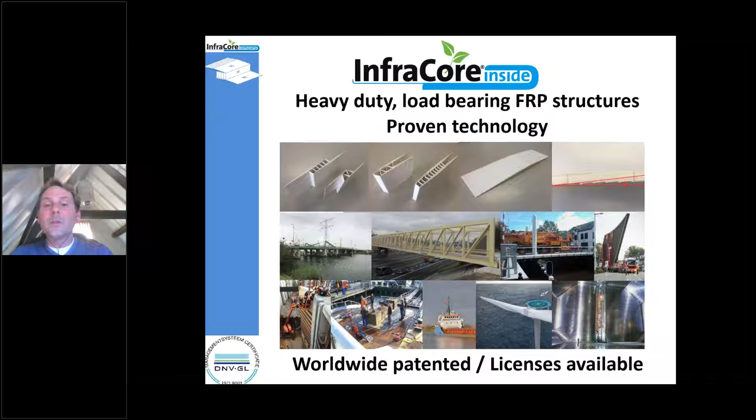As Ruben indicated, we are in heavy-duty load-bearing composite structures. What you see here are a number of bridges. On the lower left, you see the world's largest composite lock gates, which I will show later on as well. And bottom right, the second picture from the left, that's a helideck that we did for the bigger yacht of Steven Spielberg. So we have already a number of applications on board of real ships.

As stated, I will start with FiberCore Europe. What is FiberCore Europe? Focusing on bridges and lock gates, they have their own production facility in Rotterdam, and they are really pioneers in the composite bridge world. They have been doing that since 1996.

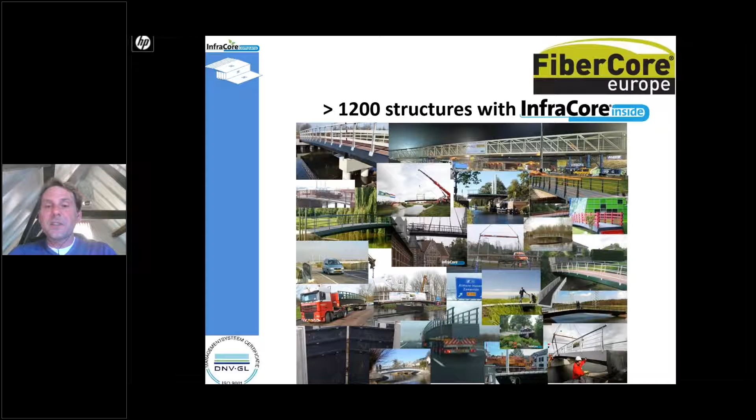So how many bridges? They have delivered more than 1,200 bridges already in the last couple of years. These bridges go from the lighter class, the pedestrian bridges, all the way up to the heaviest load class, the 60-ton class bridges for heavy traffic.

InfraCore IP is another company within the InfraCore holding. That's where all the patents are stored. We have patents on the way fabrics are placed in the products, patents on the way of infusing those fabrics, so how the resin is introduced into the end product, and we also have patents on the mold system, because it's interesting to mention that these 1,200 bridges have been built on the same mold, so the mold costs are in most cases out of the commercial equation, which brings me to the first bold statement of tonight.

It's a fact that composite materials are more expensive than conventional maritime products such as steel, but FiberCore Europe is cost competitive purchasing-wise with their composite bridges as compared to wood, concrete or steel. One reason is that the mold system is out of the commercial equation, and there are other reasons which I will elaborate on during this presentation.

What you see here is the basic technology, how the fabrics are placed. And we have solved one of the biggest challenges of the composite world, namely delamination, which means a crack can propagate between layers, which can also happen with us. But we have made delamination inconsequential because it cannot grow further than a certain extent, and I will explain that in a few slides.

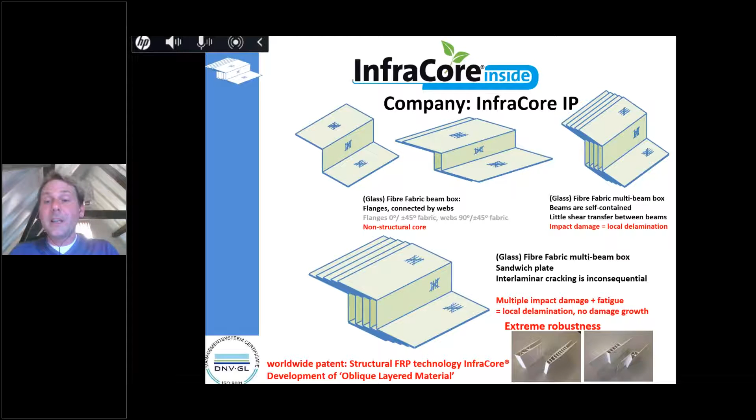We already have a number of licensing agreements with partners everywhere in the world, so that could also be the case for you. The technology is available under license to whomever is interested in it.

So I stated that fatigue after impact will lead to local delamination, but it cannot propagate. That's not only a theoretical statement, it has been proven and validated, and it has been witnessed by DNV. What you see here is a 60-ton traffic bridge, which has been seriously impact damaged and has been put into a fatigue cycle of 120 years, so 30 million cycles.

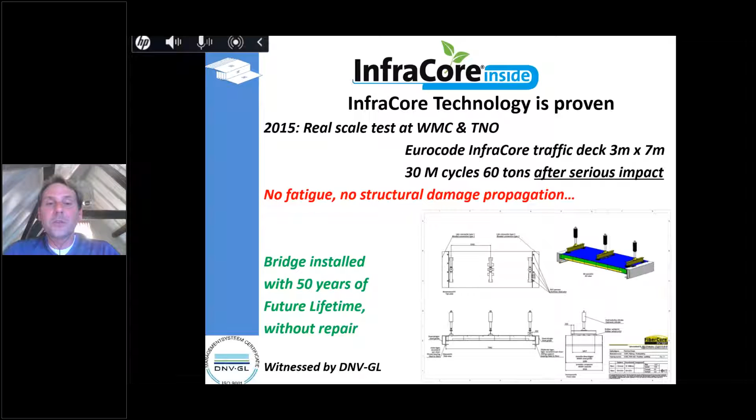We have proven that the delamination from these local impacts has not propagated, has not grown, which has led classification societies to state that this bridge could be installed without repair for a remaining lifetime of 50 years. I'm super proud of being capable of saying that a bridge can be seriously damaged, put into a fatigue cycle for 120 years, and can be installed without repair with a remaining lifetime of 50 years.

So these are the typical pictures that most people have when they think of composites. It's an amazing material, but once it fails, it fails rapidly. Think of wind turbine blades that collapse globally because of fatigue, or ships subjected to slamming loads that just delaminate completely. That cannot happen to this extent with our technology.

Our technology has a serious track record. More than 1,200 heavy-duty structures have been realized. We are very cost effective. We are damage tolerant with extreme robustness. Last but not least, one of the weaknesses of composites is that they fail fast under fire. We have excellent structural load capacity under fire, which I will also demonstrate later on. And we are lighter and cheaper than conventional sandwich composite structures, which I will also explain during this presentation.

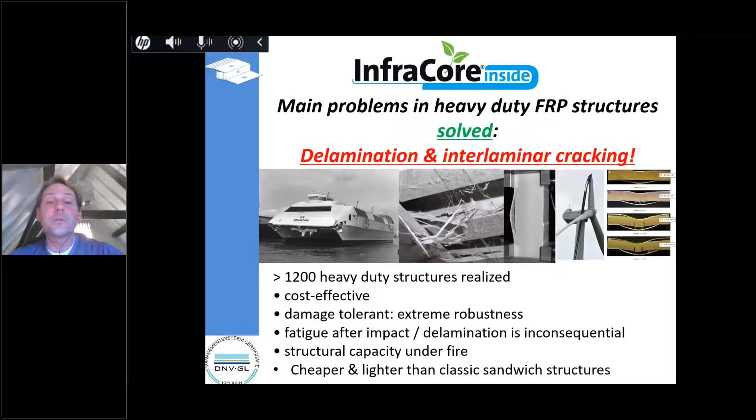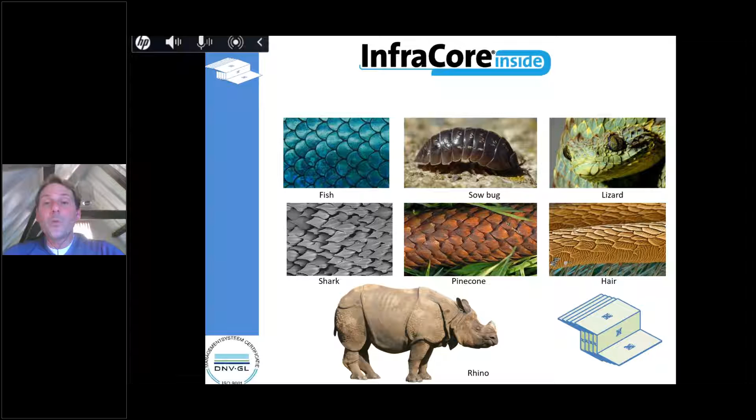Did we invent something? Definitely. Was it inspired by nature? Certainly. What you see here is actually an oblique layered structure, which you can see in fishes, sharks, bugs, rhinoceroses, even in our hair structure. We have actually the same basic principle in our composite technology.

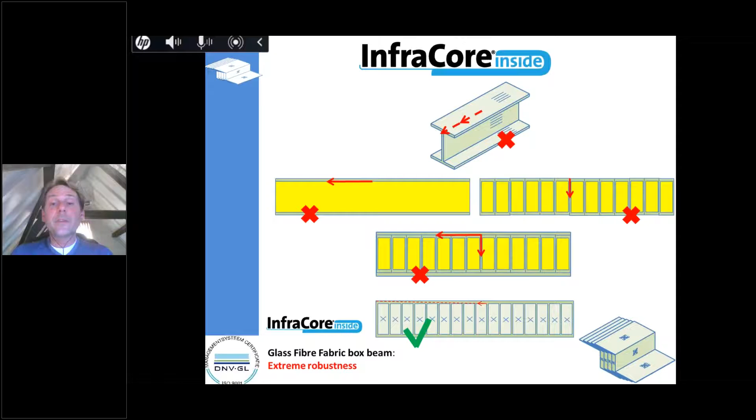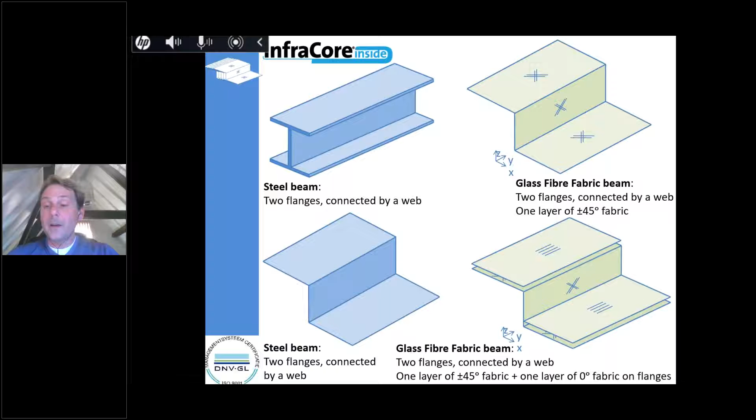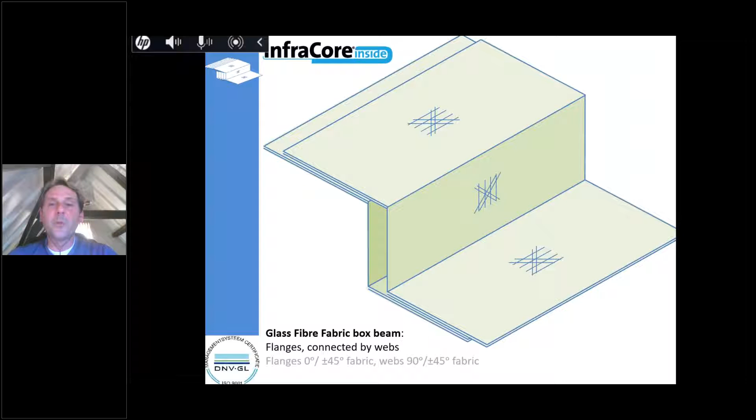So we start with this basic Z layer. We add additional material where deemed necessary, and we just continue stacking those fabric beams. It's very important that you understand these fabric beams in this phase are not consolidated. These are dry fabrics placed into a mold in a very fast and efficient way before being frozen in their end geometry by injecting resin.

In order to stack these preforms, between these perpendicular webs you have non-structural foam. So in the first step of our production phase, we take a foam preform, wrap it, surround it with dry fabrics, then go to the mold and stack these preforms next to each other.

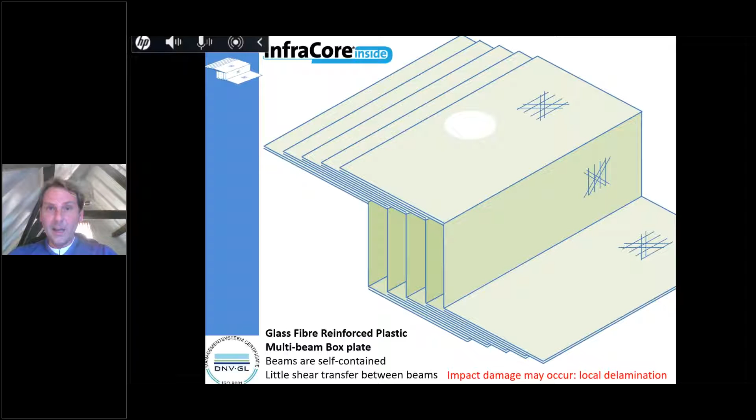And once the product is consolidated, injected with resin, you would impact it as I just did, and then fatigue it. This is just showing how a fatigue cycle would look by driving over it with a wheel, but it could be hogging and sagging because of a ship.

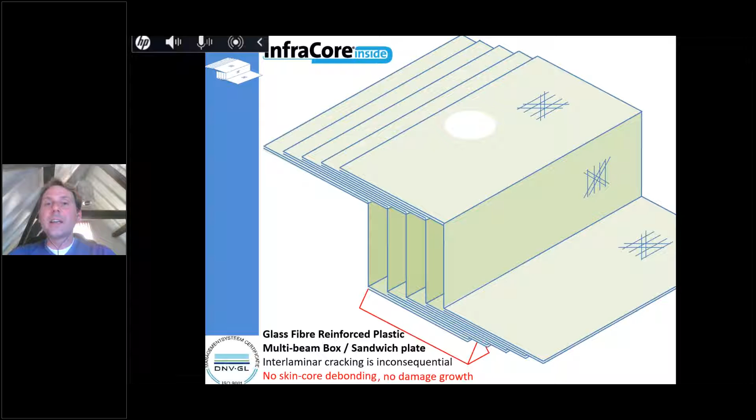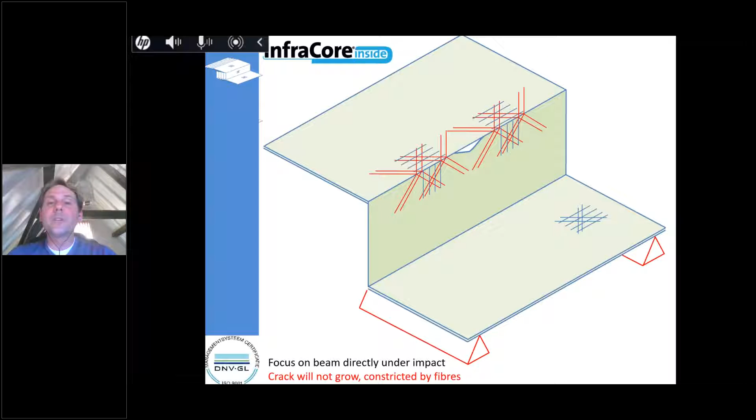This local damage cannot grow any further than the overlap you see in each preform. So again, you see this local impact attacking this vertical web, but there's plenty of remaining material around it, surrounding it, to transfer the loads.

And you could think, okay, this is a nice way of doing that. So you have these inner stiffeners in a certain direction. But what if you need shear stiffeners in the other direction?

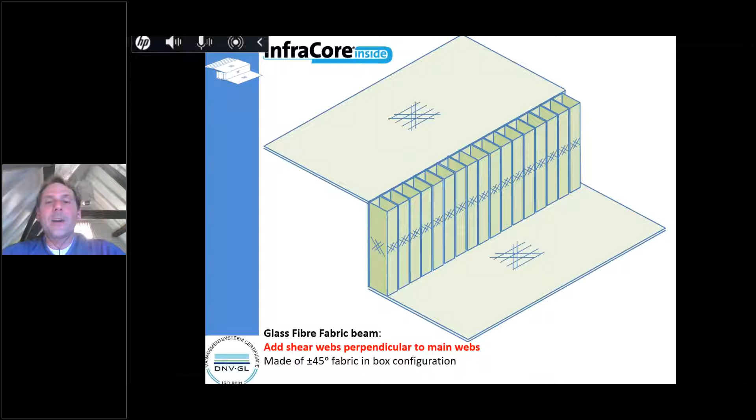Then instead of working with a standard non-structural foam block as core material, you would work with these little blocks which have been surrounded by fabric in order to have webs in the other direction. So we can definitely work with webs in perpendicular direction to the main webs.

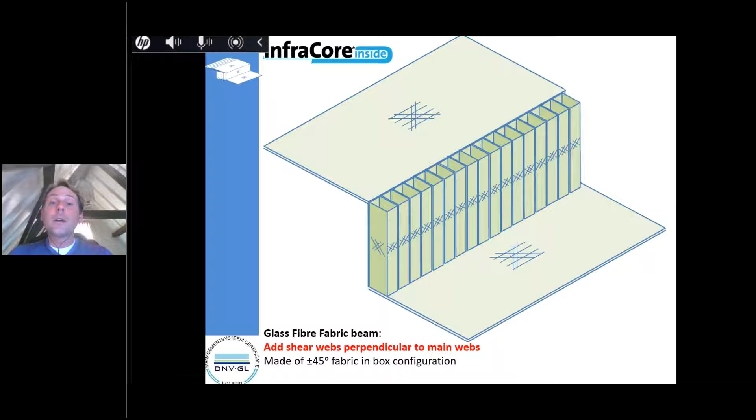And if you need even more strength, instead of using a non-structural foam block, you could work with a full composite monolithic block, which enables us to transfer massive forces in the out-of-plane direction, and also helps us drill holes wherever deemed necessary. So you could attach an engine foundation, for instance, just by drilling holes in these monolithic blocks.

So what I'm trying to say is we can place webs in each direction as we want. If deemed necessary locally, we go for a full reinforcement, which enables us a lot of flexibility in the design, in the production, and in the outfitting eventually.

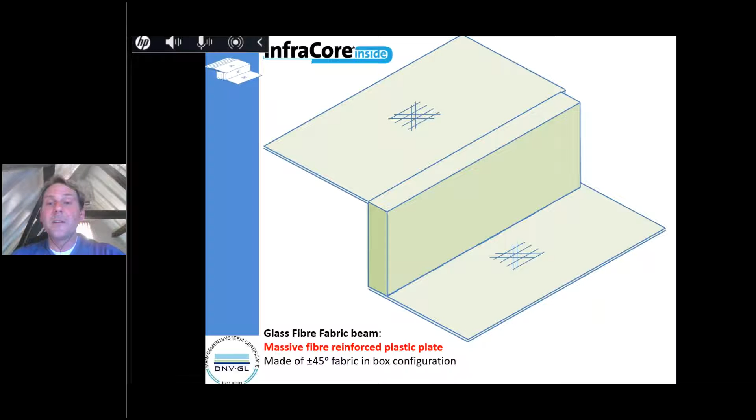So this is, I think, the best illustration of our technology, where you have these overlapping layers, which enables us to avoid this global crack growth propagation, which would lead to delamination.

We can add webs in every direction as deemed necessary, and we can make structures going from a height of 4 centimeters all the way up to what we already did. We could go further, but we already went to structures with a height of 3 meters. So we can make very slender products, but also very high products.

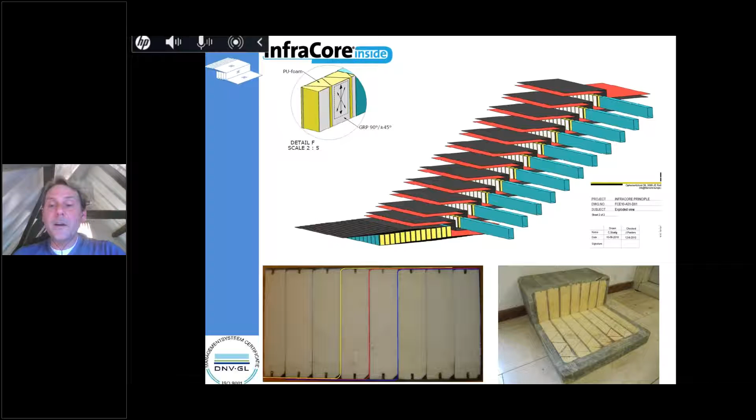And the suggestion could be that we only make flat products, but later on we will show that we can also make curved structures, and even hydrodynamic profiled structures like rudder flaps.

So that was about the fabric technology. Then I would like to focus on the sheer size of the products, because another aspect of our patented technology is the resin infusion.

So the way we inject our products, that's a modular technology. For us, it's kind of irrelevant how large the product is, because the resin infusion strategy is modular. Whether it's 1 square meter or 1 square kilometer, for us it's the same building block approach, just a matter of scaling it up. What you see here is a 60-ton traffic bridge.

What you see here is a 142-meter bridge, which is a hybrid bridge. So the vertical steel trusses are there, and the road you drive on, that's our InfraCore bridge. So we also make hybrid applications, how to assemble composite to composite or composite to steel. We have that knowledge in-house.

A nice anecdote is the composite and the steel of this bridge was assembled on site next to the highway in the middle of winter. It was freezing cold, and the bridge was placed in its final position in 2 times 4 hours.

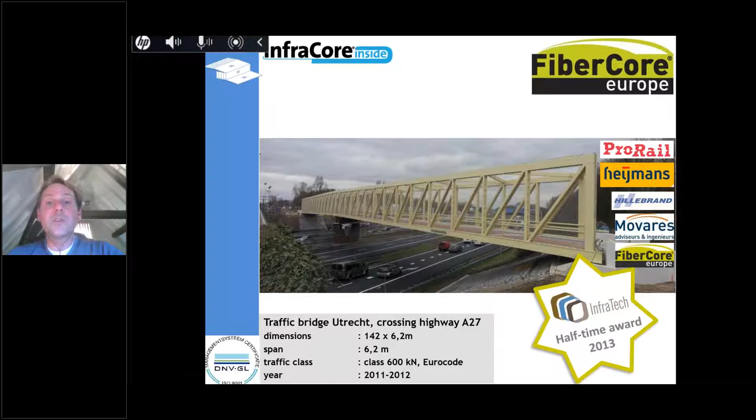The composite technology definitely has advantages in terms of robustness, but it's also lightweight, and it facilitates benefits in mounting and transporting, and I will come back to that later on.

This is a nice example of the size of our product, but also relatively lightweight, so you can still transport this massive plate on a truck in this position. And these bridges are so lightweight that they are buoyant.

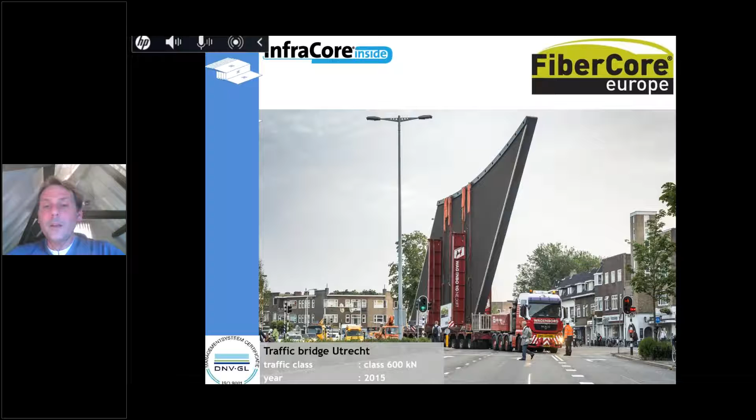So there are places where it was difficult to get to with a truck, but there was water in the vicinity. So you just attach them behind the tugboat, because they are buoyant, and you just tow them to their final position. The world's largest lock gates are placed in the Wilhelmina Canal in the Netherlands.

They stop a water column of, out of my head, 9 meters, and if these lock gates would fail, Rotterdam would be flooded. As our foreign friends probably know, most of the Netherlands is below sea level. So this lock gate is critical, absolutely critical.

If these would fail, Rotterdam again would be flooded. So we had to demonstrate to various players, for example ministries, that this application is safe. We had to demonstrate that these composite lock gates could survive an impact of an inland vessel, and we take pride in ensuring that our applications are the last in line to fail.

So concrete would fail first, then the steel pins connecting the lock gates to the outside world would fail, and only then are we allowed to fail. So these products are extremely safe.

Why is that? One of the reasons is composites are more flexible than steel. So most of our applications are designed on stiffness, on deflection, and strength is a result of that. So the strength and safety reserve factors you get are huge.

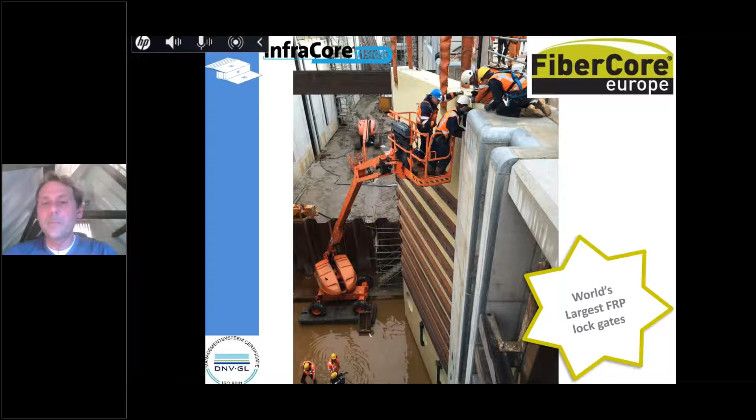Also a nice anecdote: these lock gates were also buoyant, so we had to add weight in the bottom to make sure they would not float. And because of using these monolithic heavy blocks in the bottom, it enabled us to drill these water flow channels that you see in the bottom - just a matter of drilling big holes through these massive blocks.

Then we zoom in on InfraCore Company. What is InfraCore Company all about? We use the same technology as FiberCore Europe, but we do not use it in bridges and lock gates - that's their business. We take care of all product market combinations in other sectors.

And we do that together with key strategic partners, based on the proven track record of FiberCore Europe and on the patented InfraCore technology. Our basic philosophy is we do what we are best at, that's composites, and we cooperate with partners that have additional strengths and knowledge. Again, our technology is available in licensing forms or partnerships.

So I come from the maritime world. I'm an aerospace engineer, I also have some degrees in naval architecture, and I've been active in the maritime world for a couple of years. So InfraCore Company is also heavily involved in the maritime, offshore and inland business.

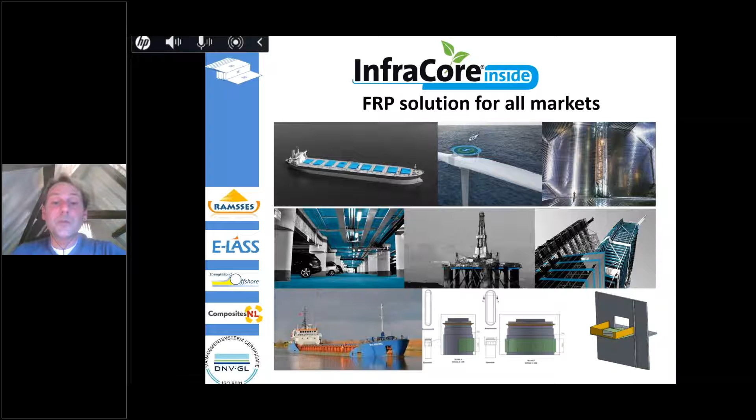What you see here are a number of applications that we're thinking of. Just look at the pictures - hatch covers, offshore access platforms, heli decks, also massive hydrogen tanks, offshore platforms. We could do total ships, ship elements, balconies, fenders.

What you see here is a non-protected, really basic InfraCore composite structure, which has been subjected to 2 hours of fire testing under structural load, because we had to prove that the structural load capacity of our technology is good in order to install this heli deck on the mega yacht of Steven Spielberg. This fire test was stopped after 2 hours, not because there was a reason to, it's just nothing was happening, so the Fire Testing Institute said there's no reason to continue.

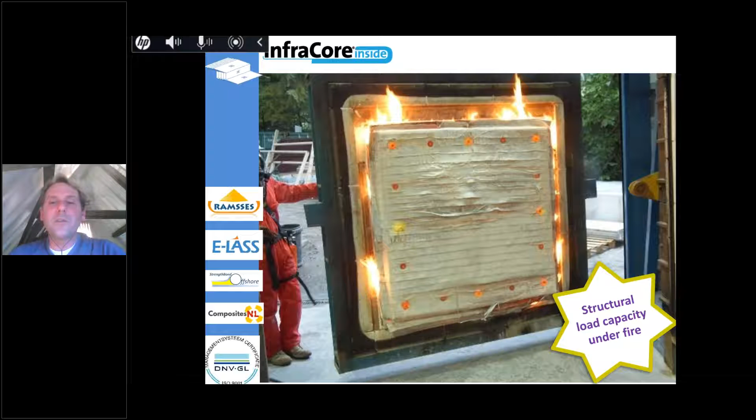This could survive the fire for hours and hours, which helped me, together with my colleagues, convince Meyer Werft, a huge cruise ship builder, to start a project with them. We developed for them inner and outer composite walls which should replace the steel bulkheads, but also have in the concept the fire insulation, the noise insulation, and the aesthetical finish. So instead of having steel plus fire insulation, noise insulation, and an aesthetic wall, we developed one fit-all solution. Everything is in our bare composite structure.

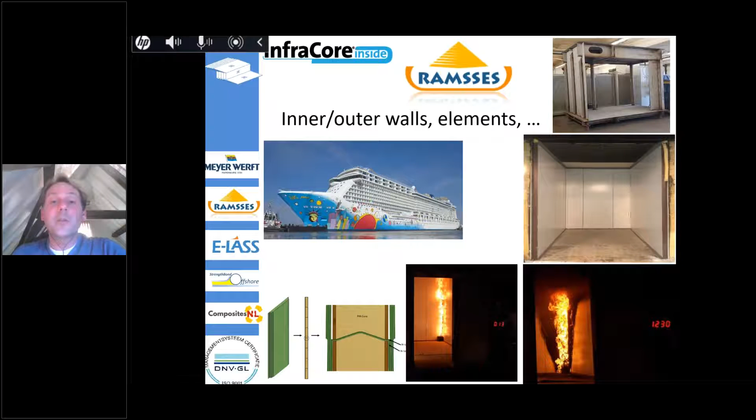We developed a solution which is really impressive in terms of fire protection, which enabled us to reach an FRD 60 certificate. What is FRD 60 for our steel friends? That's the composite equivalent of A60. So it's a structurally loaded structure which can withstand 60 minutes of fire under loading, without a temperature rise that exceeds a certain threshold on the backside, and with a maximum allowable deflection. Again, without added passive fire insulation, it's just the bare composite structure which has reached this FRD 60 certificate.

Another project I want to briefly highlight, because I could talk for days about this one too, is called patch repair of FPSOs. FPSOs are huge ship structures that are so large they cannot go into dry dock. So the repair and maintenance should happen on site, at sea. And if you want to crop and weld, you need to inert the tanks, which takes weeks and sometimes months, which is very costly. So we were requested by big players like Total, Petrobras, and Naval Group to come up with a composite patch repair enabling cold patch repair.

So we would just laminate, actually resin-infuse fabrics onto the strength deck of FPSOs, so that the strength deck would be nominally performant again, without any disturbance to the operation.

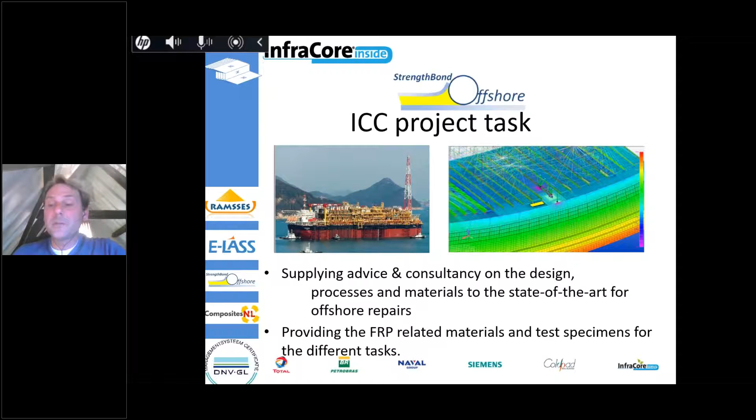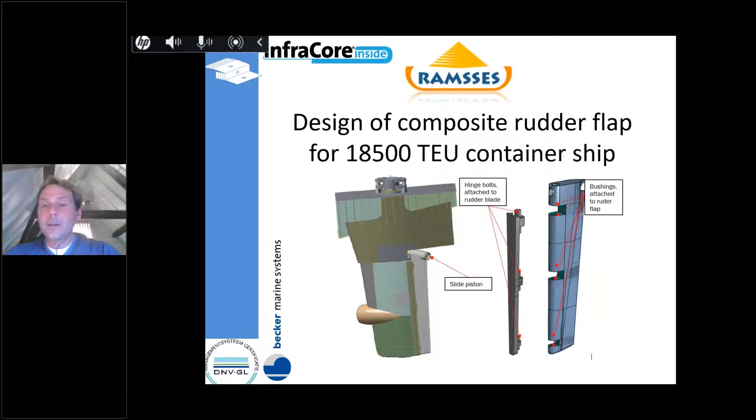Then this project. What I should first state is that our InfraCore composite technology also has a specific patent on NACA profiles, so we can make airplane wings, wind turbine blades, but also rudder flaps. We convinced Becker Marine Systems to trust us in developing for them a rudder flap, actually the largest rudder flap they have sold until now, in composites. This is the composite rudder flap for the 18,500 TEU container ship. What you see on this slide is, on the left, the aft ship, the rudder stock, and the rudder flap. And the rudder flap is the baby, a big baby, that we developed.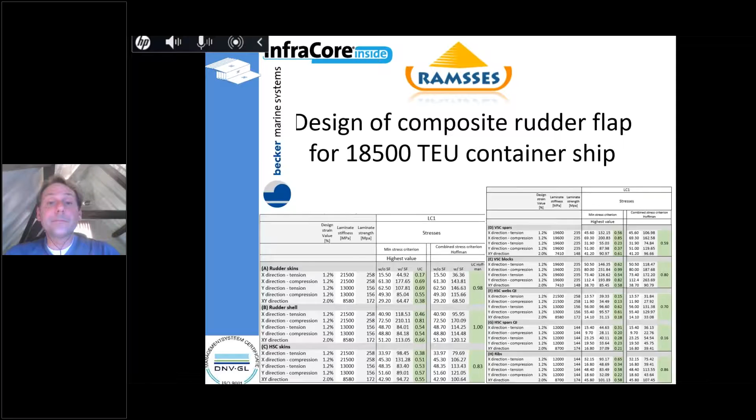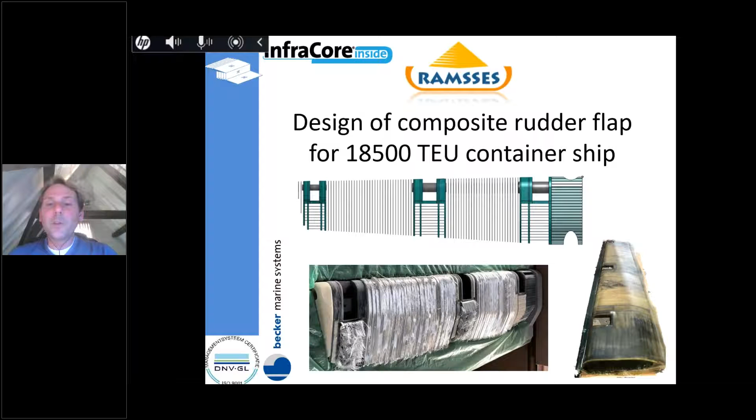Then we produced a scale 1 to 6 rudder flap, because we could well have produced it at scale 1 to 1 — again, size does not matter for us — but you should be capable of testing such a thing. This rudder flap has, just to give you a feeling, 100 tons per square meter loading, so it's a heavily loaded beast. In order to test it in an ultimate way, up to failure, scale 1 to 6 was chosen.

And how did we test it? This was tested in Hamburg by Becker Marine Systems. It was tested in a steel rig, and the deflection was imposed by inflating air cushions, the type of air cushions you could use to lift ships or skyscrapers with — really heavy-duty air cushions. And on the lower right, you see a picture of the rudder flap.

For us, aesthetics is an option. We can also make nice polished and shiny composite structures, as most of us know, on sailing yachts and mega yachts. But for us, aesthetics is an option.

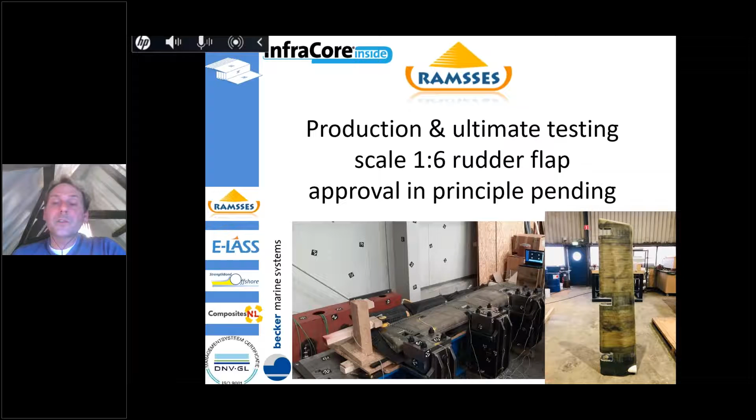Becker Marine Systems agreed with us that this rudder flap should be as light as possible, but as cost effective as possible. So if the steel has an allowable tolerance of plus or minus 5 millimeters, why should the composite be smoother? We agreed with Becker that it should have the same rough finish as the steel one, which enabled us to use a very rudimentary mold system, leading to reduced cost. We could make it polished again, but good enough is good enough, and aesthetics is for us an option.

What you see here are some pictures showing the rudder flap under loading. We reached something like 2.5 times the class load, so plenty of safety factors in this design again. Dry testing was successful, very successful.

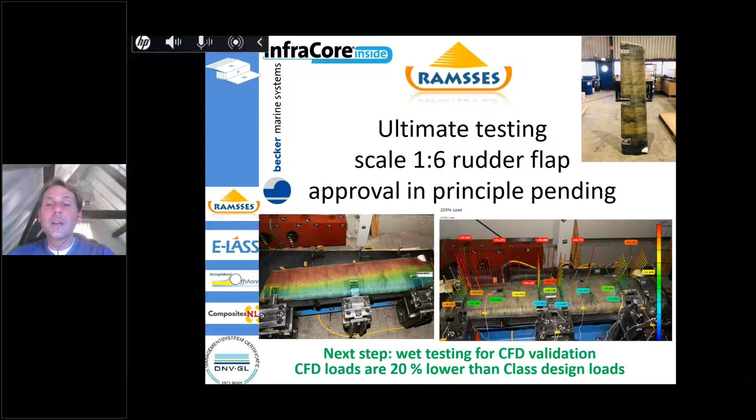Next step, we will produce a second rudder flap which will go into wet testing, so that we can validate the hydrodynamic performance of the rudder flap, and also demonstrate that the actual hydrodynamic loads are 20% lower than the class imposed loads, meaning this rudder flap is more than safe enough.

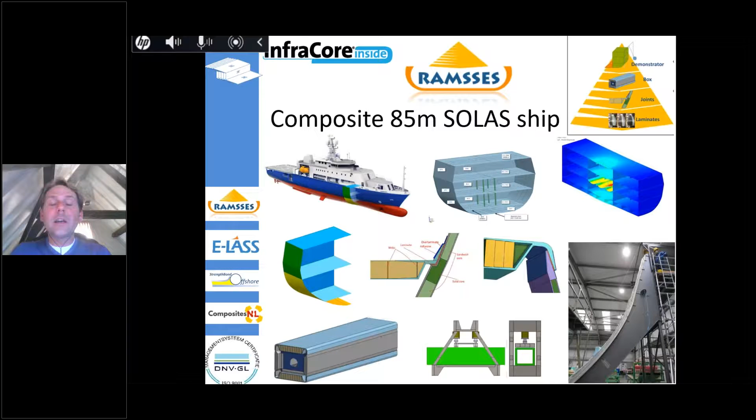This brings me to the next project I want to highlight. This is a project we have worked on together with project partners. Work package leader is Damen Naval and Damen Shipyards, Airborne Composites, Airborne UK, also a composite player. We have Evonik, a huge company active in chemistry, who developed the dedicated resin. We have TNO, who was involved in the testing, which we will show later on. So this was a joint effort.

InfraCore was in the first instance approached because of the heli deck. You can imagine that if you can make a 60-ton traffic bridge, a heli deck for a ship is kind of similar. But during the course of the design work, in good accordance with our project partners, we were allowed to take care of the decks, also the inner decks. So we took care of the strength deck, the heli deck, the inner decks, but also the bulkheads. We also took care of the joint design, the assembly, the overall assembly, and we did the infusion of the hull. Airborne UK did a sandwich hull, and we did an InfraCore hull, which I will show later on.

The result of this design work is that Damen initially did a full sandwich ship design, which was already way lighter than the steel benchmark, something like 40% lighter, I think. And we reduced this weight even further by translating sandwich into InfraCore, so the weight reduction was stretched 15% further. I think we have proven to our partners that our solution is not only lighter, but also more cost effective, and has increased robustness as well.

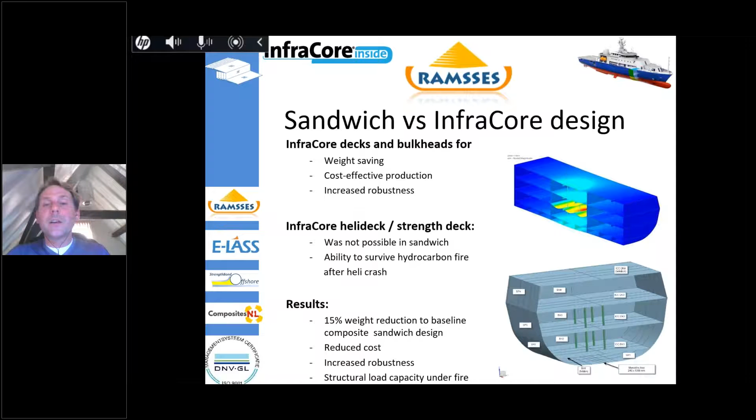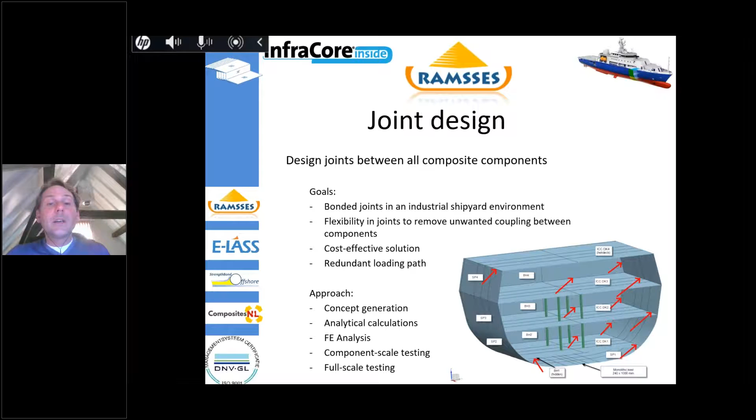As said, we also developed a joint design. For us, it's very important that everything we do, we want to do wherever deemed needed. So whether it's on an FPSO in the middle of the ocean, or we should build a composite ship in a steel shipyard, that's what we want to do. We developed joints which can be created and assembled wherever, and we did that at Damen in the steel shipyard.

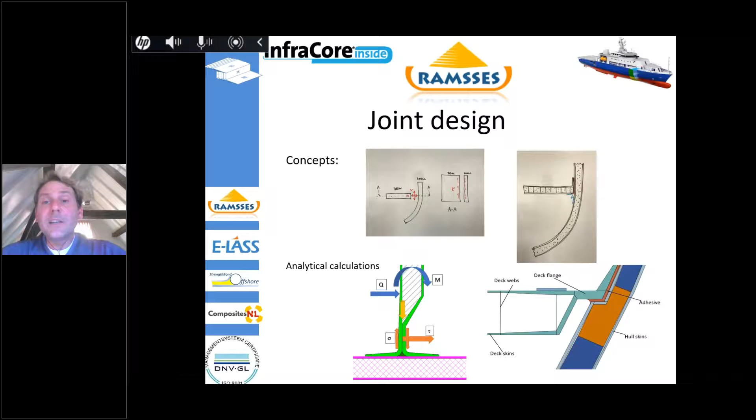We want to have plenty of redundancy. Most of our joint designs are based on 3 basic principles. Here in the ship design, we respected 2 of them. First, we want to have a shape lock, so even if the connection would fail, it cannot move, it cannot go anywhere. That's basic principle number 1, shape lock. And number 2, chemical lock, in this case an adhesive connection.

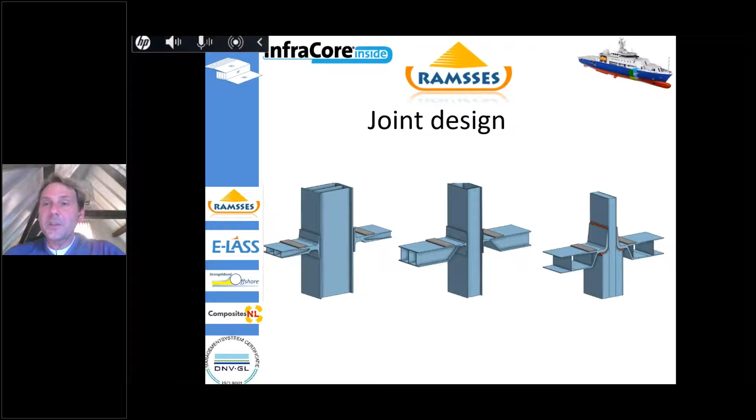These are basic designs of the ship joints that we have developed. So for the ship, or for the hull deck, the deck bulkhead, the hull bulkhead, all possible joints that can be found in a ship have been designed, produced, and tested.

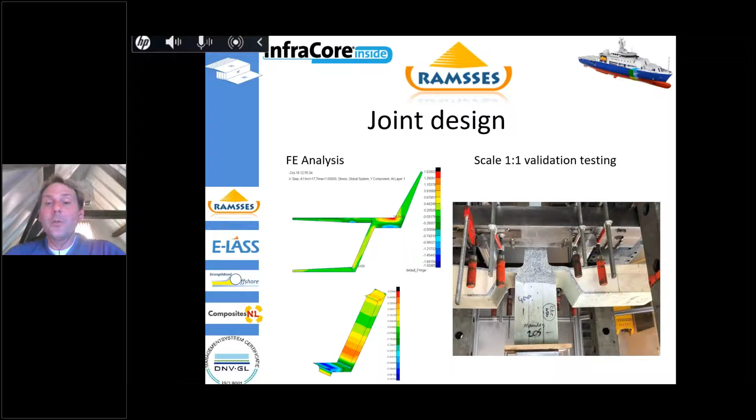On the left you see first the detailed finite element analysis, and then we produced scale 1-1 joints, all types of joints that were then tested by TNO to prove and validate the design work.

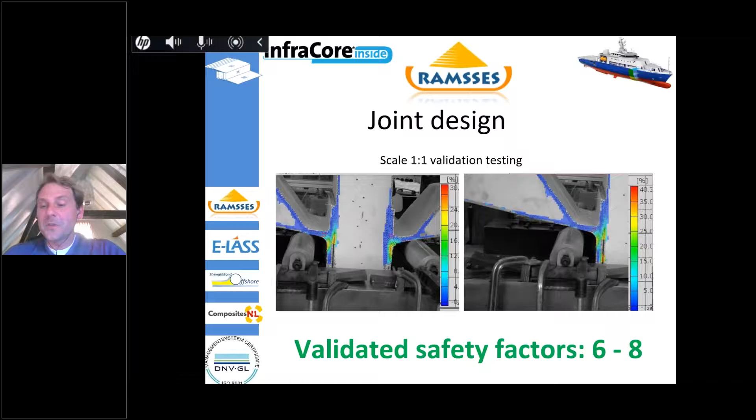All designs, all joints, all joint types have been tested, and all have survived the ultimate test with safety factors minimally 6 all the way up to 8, which was nice because it enabled class Bureau Veritas to say that fatigue assessment was not needed of these joints. If you can demonstrate a minimum amount of safety, additional detailed fatigue assessments are not required. And that was reached.

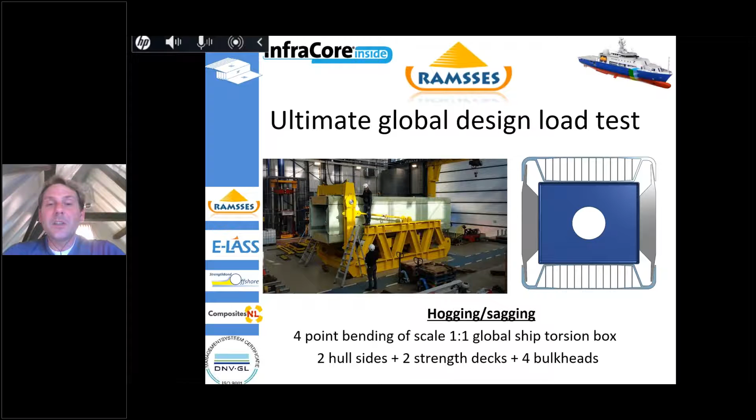So that we could put this ship-like structure in a 4-point bending, thereby testing this ship structure in global loading, hogging, and sagging. And that's what we did.

This was one of the most impressive tests that I've had the pleasure of witnessing professionally. We demonstrated that this global design met twice the design load. The steel frame is there to introduce the global bending. 400 tons of pressure was the design load, and we reached 800, so twice what was requested.

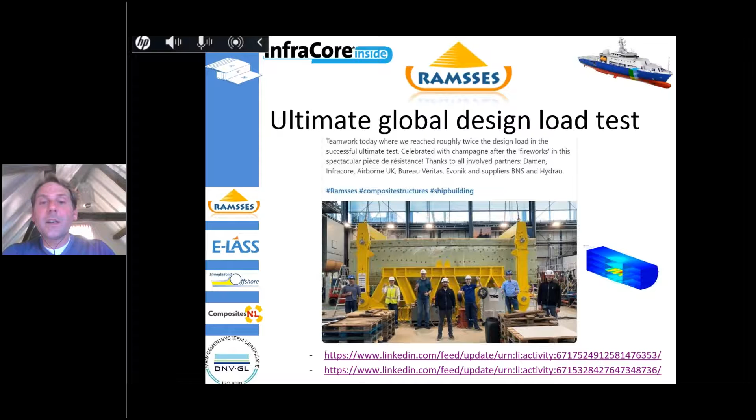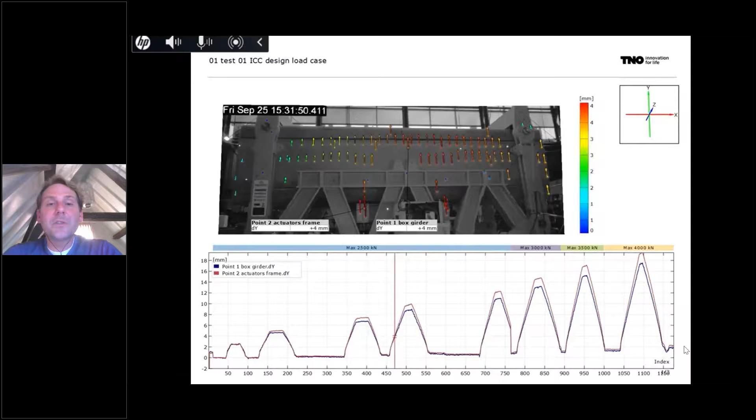Again, plenty of safety. I have some movies to show you what this is. This, for instance, is the design load test, so this 400 tons, that's what you see. And it's kind of funny because I had bets with TNO.

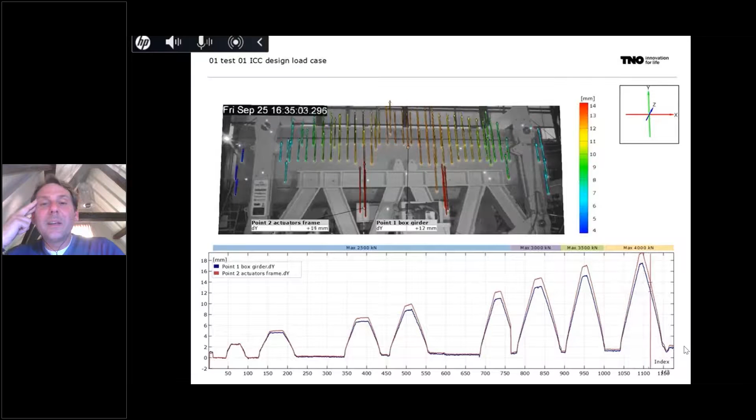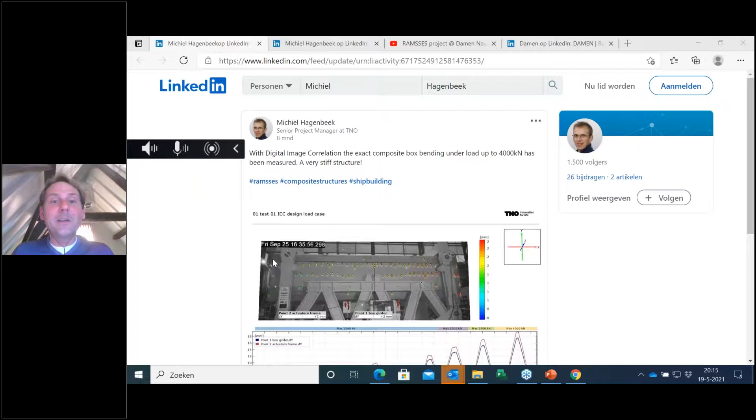I was betting that the steel frame would fail. In the beginning they were laughing, they said 'Yeah Laurent, funny guy.' But during the course of the testing they became a bit more nervous. So it was funny because it was a fair battle, steel versus composite.

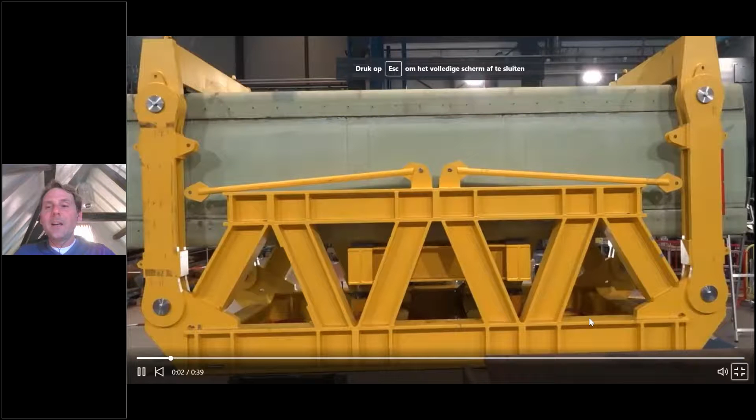I will go then to the next movie, where you hear the pings, little pings. Those are just fibers breaking. Imagine that you have millions of fibers in this box, so hearing here and there a little ping, a little fiber breaking. That's nothing to worry about. This is what is happening with this box.

Again, nothing spectacular. At the end of the day, after 30 minutes of suffering, there was more noise to be heard, which is understandable. But this lady behaved beautifully under this global design. Very pleased with this result again.

And then I go back to the presentation. Let me see. Yes, here, use it again.

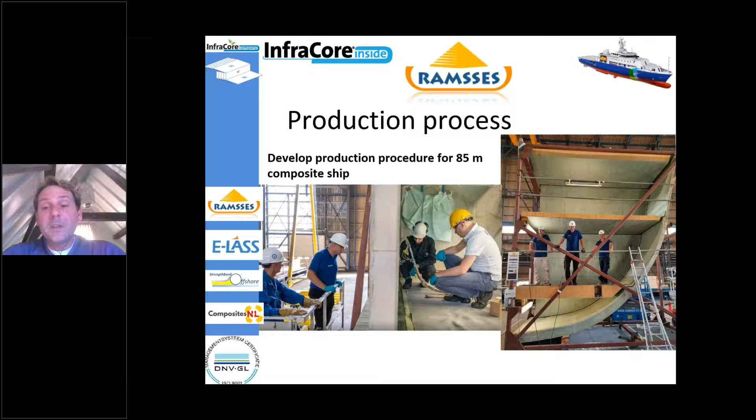So we have now already discussed the joints, the global behavior, but what is also nice is to produce a ship compartment in a steel shipyard environment. That's what you see here. We also needed something so that we could do the heli crash testing, the hull impact testing. So this was also the purpose of this demonstrator, and we also wanted to really demonstrate how fast a composite ship can be produced.

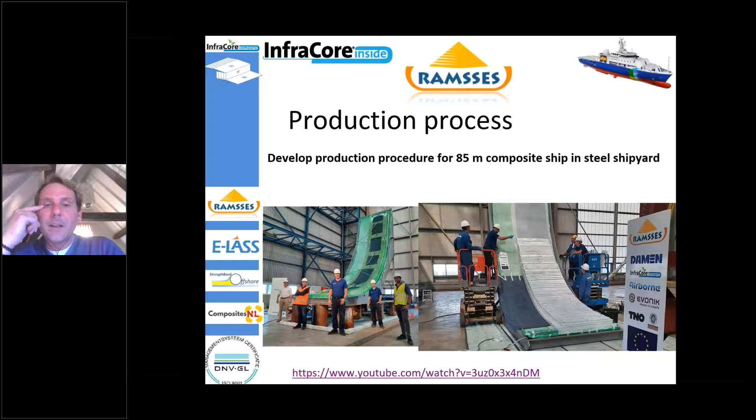And I have again a movie to show you this. First I will say something technical again. Making horizontal injections, for us size does not matter. When you make large ship-like structures, you have the vertical challenge. Vacuum infusion, resin infusion is done with a 1 bar pressure difference, reaching 1 bar of pressure differential. For instance, 10 meters in height, that becomes an interesting challenge. So we had to prove within this project that we could inject vertically these large hull structures.

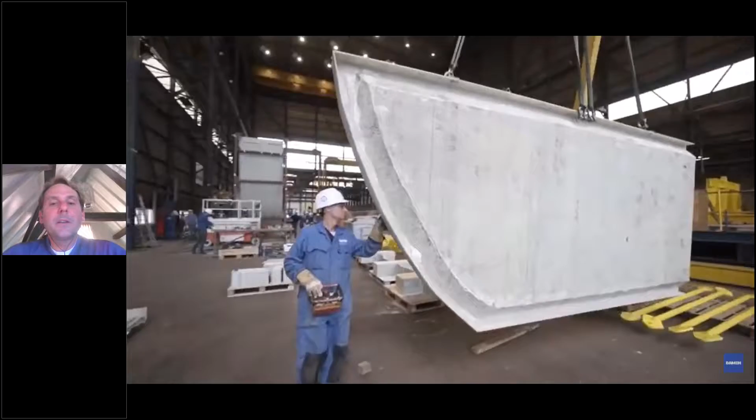And that's what we did. So let me show you this movie. You see here, by the way, also all these connections laying on the floor. So you see now a bit more the size of the scale 1-1 joints. And this was done in 2 days, 2-3 days.

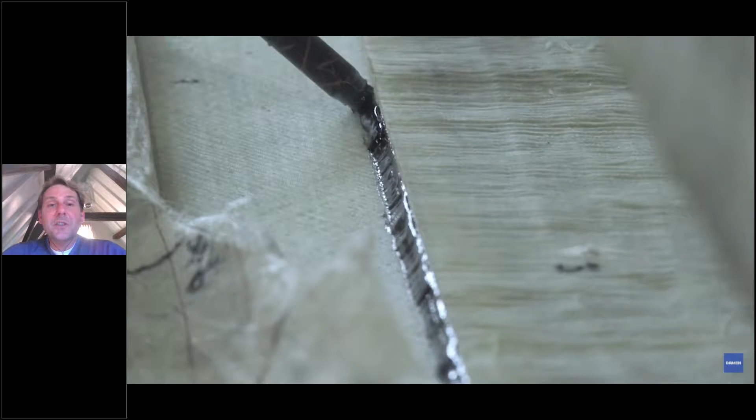So a very small team of people, fully adhesively bonded connections. This is sealing off the cavity so that the adhesive can be injected, because we developed an industrialized way of applying the adhesive.

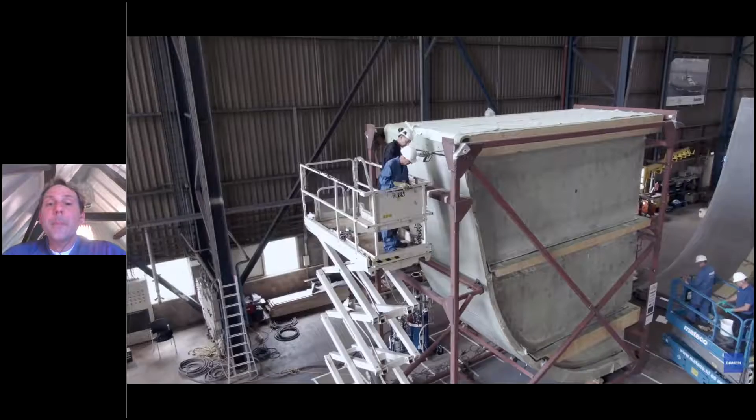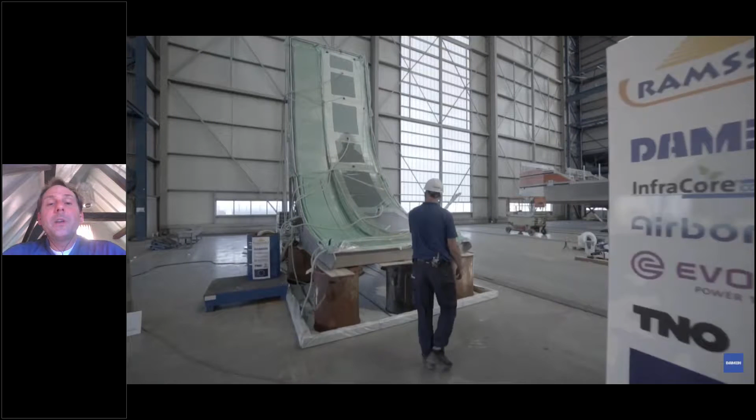And we did the hull infusion live during a general assembly. So we did not do it behind closed curtains. We did it live in front of 120, 150 people, on the hottest day of the summer by the way. And this is the resin infusion, which took 2 hours. Whether we do this section 1 meter in width or the full hull in one go, it does not matter. For us, again, this technology is fully scalable.

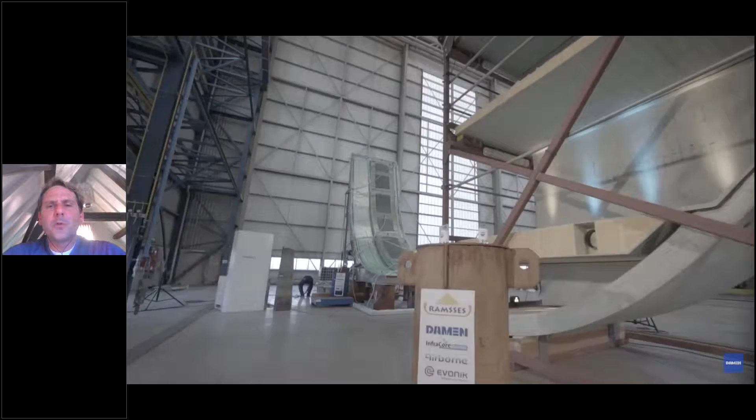And this is how we reached, I think it was 6.5 meters, but we could go higher. So definitely doing infusions up to a figure of 8.5 meters is definitely doable.

So again, we did this live during the General Assembly in front of all the RAMSSES members. RAMSSES, by the way, is a European project where all the biggest European shipyards are involved, and everybody looked live at this resin infusion. So again, very confident and nothing to hide.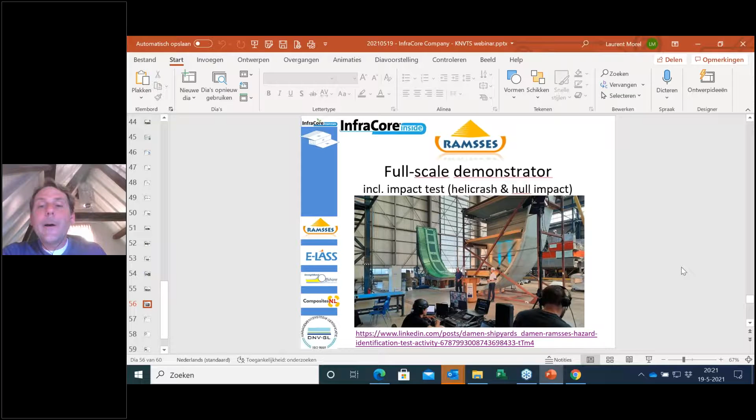What was done here is, at the end of the day, we did I think 4 or 5 heli crash impact tests on the heli deck with energy levels twice as high as what would occur with a heavy class helicopter, so multiple heli crashes. And it was a success.

And then a heli deck structure with damage was sent to Sweden for a hydrocarbon fire test, which I think lasted for 60 minutes. A fire which was more severe than what would occur with a real helicopter fire, and it was easily extinguished after 60 minutes. There again, we proved that it was good enough.

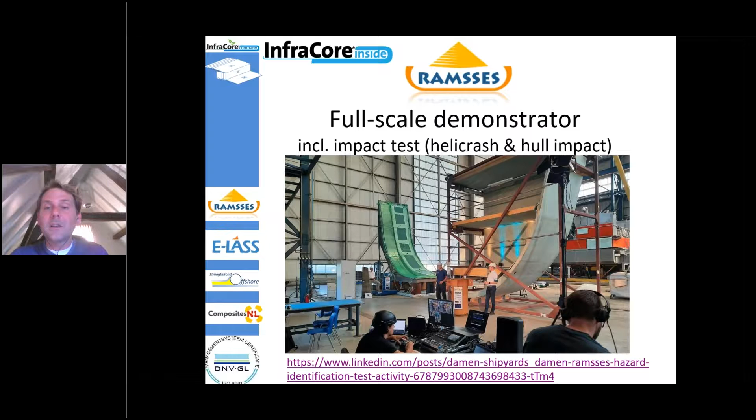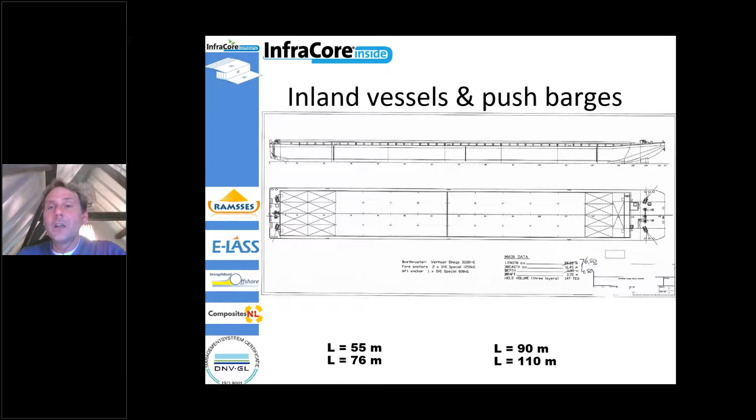And then I want to finalize this presentation by showing this. A number of companies contacted us a couple of months ago because they were interested in composite inland vessels, composite push barges. We want to help our customers and we see a potential in this field. So we did 4 designs: a 55 meter, 76, 90, and 110 meter full composite push barges. The basic design is done, and I just want to show you the results of the 76 and 110.

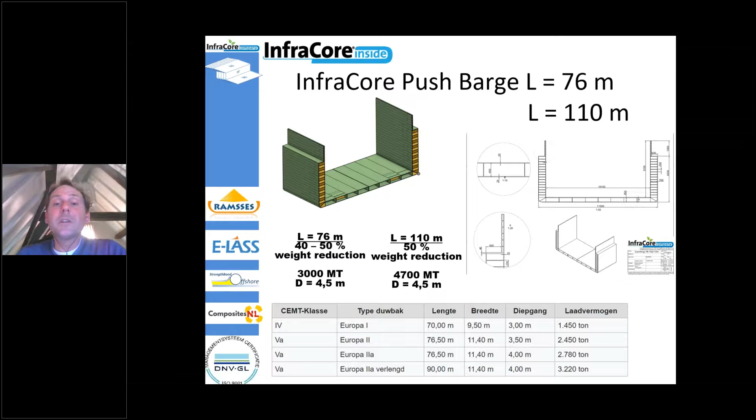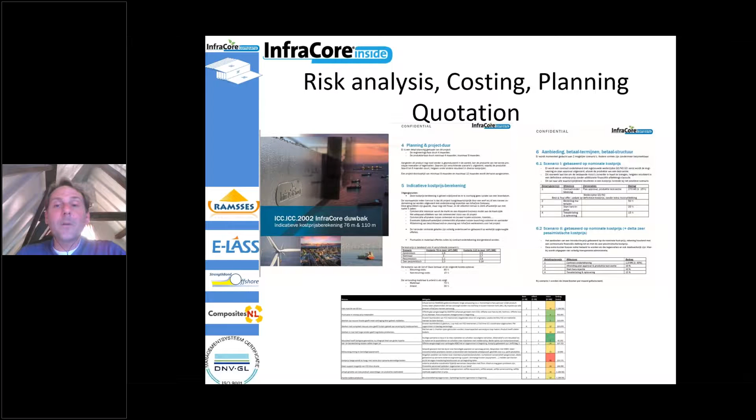For the two, half of the structural weight is taken off as compared to steel. We can take the same cargo load as the steel sisters, but it's simply more lightweight, so it has a more shallow draft, or it can take more payload. And what we did also, it's not only a design, we did also a full cost calculation with risk analysis. So costing is in place, planning is in place, quotation has been handed over to a number of players, and we are ready for this commercial project once it has been signed and ordered.

That's how I would like to conclude my presentation. Thank you so much for your attention and your time.

So now it's time for questions. There is a question panel where you can type in your questions, and we have received a few. So Laurent, these cabins, the project you did at Meyerwerft with the FRD60 panels, is that for accommodation panels or cabins, or where are these applications going to be used at the ships at Meyerwerft?

It's a good question. So these could be inner walls and outer walls. Inner walls would be for both working spaces and cabins. So the aesthetical wall finish would then be for the cabins, and for the working spaces the aesthetical requirement is less. So it's one solution fits all, and it has been developed for two production phases: the late stage outfitting phase, where actually welding would not be allowed anymore on board cruise ships, so these panels would be adhesively bonded, so only cold work, or they could be prefabricated in larger sections and already installed in the block building stage. So again, a solution for two potential production phases.

Thank you very much. Thank you, Laurent. Bye-bye. Thank you, Ruben. Thank you. Good evening. Bye-bye. Good evening. Bye-bye.